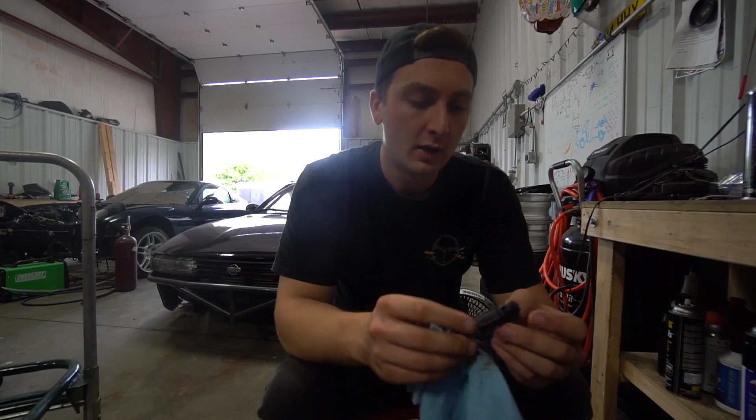And to do that, we need to up the injector size. That's the most important one. So right now, what is the stock injector, like 250s or something? I think it's even smaller than that. Sick. So we got stock 350Z injectors, and I guess they plug right in, which is pretty cool. Shout out to Damien from Haggard North, because I stole these from him. These should be fine. These should give us enough fuel for the amount of air that we want to force into his cylinders.

We want it to peak at like 8 to 10 psi. The stock long block should be perfectly fine for it. I've heard plenty of stories of guys running way more than that for years. But we have the new motor. So if we blow this one up, we have a mint one soon. We're doing head gasket and studs so we can make even more power, refreshing it, and that's about it.

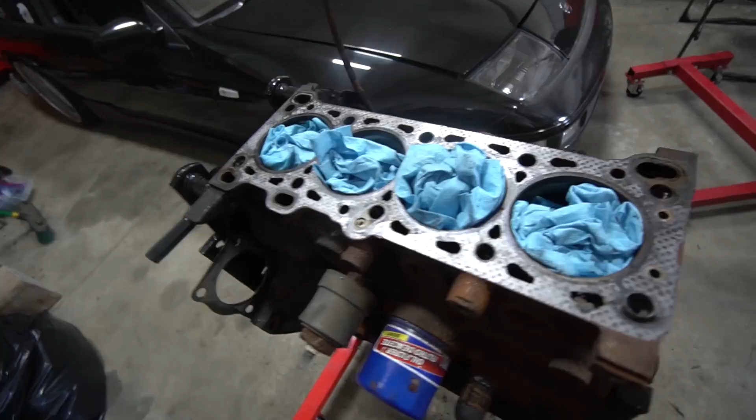Anything else you want to add, RJ? Ordered about 70% of the stuff for this today. Got front cover gaskets and all the other stuff, head gasket. I got the ARP studs coming in next week. And I've got a couple other things over here for it. I've got the bigger fuel pump and the relays and stuff like that, so when we do go to it. I've got a stage 2 clutch so we can handle a little bit more power so mine doesn't slip like crazy. Yeah, we'll see if your clutch holds up to the dyno today. Yeah, we'll see how that goes. That's the only thing I'm really worried about. But I got everything else to pretty much seal together.

A couple other things, we're gonna do that coolant reroute kit, and then maybe make some really good reliable horsepower and not just minimal reliable horsepower. I think our main goal is for RJ to make 250 horsepower, which is super doable, and 250 horsepower in that car is gonna feel like a lot.

So I'm excited, probably makes like 160 right now. My guess is 130. No, it's not that low. That's my guess, 130 wheel. It's alright, so tell us in the comments what you think it makes. Want to throw money on it? Yeah, I got $20 on... we're gonna hit 212 today, wheel? Yeah, alright, I got $20 on 180.

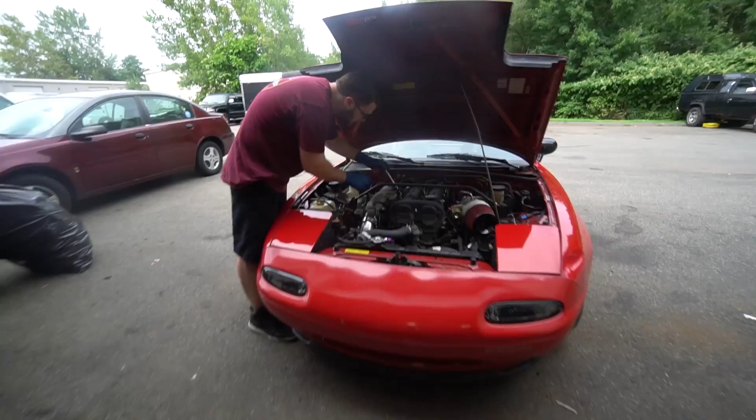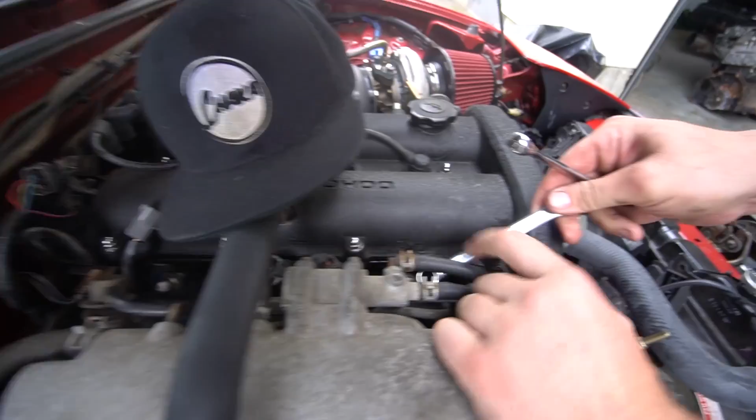These aren't 12s, are they 13s? That's a 12, which one is this one? It's a 12, right? Yeah. These bolts want to break so bad. First problem of the day. It's literally taking me 20 minutes to get the bolt out halfway. If this thing snaps, I'm literally gonna cry. Same, I am also going to cry. You're gonna be giving me a ride home.

Alright, so we didn't do enough research. It's okay, I'm not scared to admit it. So we thought they would be more plug and play, but the problem is the way the overall injector is. Do we have the other one? Yeah, I'll go get it. Stay here, just wait for me.

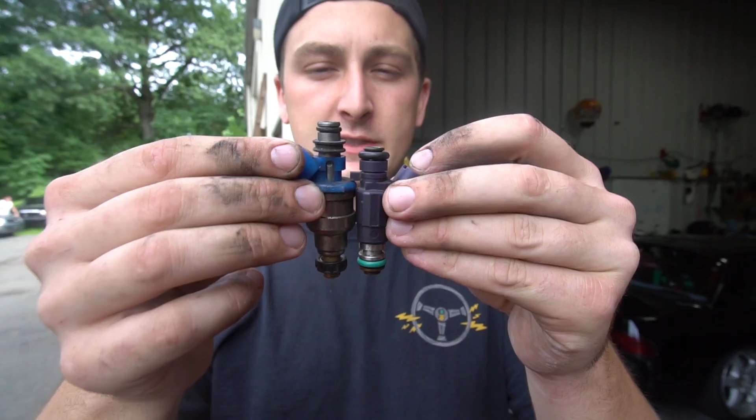Alright guys, so these are top feed injectors, so it's pretty easy to make other top feeds work. As you can see though, it's quite a bit taller than the 350Z injector. It's actually equivalent to like the same length as the BMW injector which I have, but they're not big enough, so that's not gonna work. But they have different style O-ring seats, as you can see. The top is also skinnier. So to make this work, we need a whole entire different O-ring setup, and I can't reuse these. They're not gonna fit, and they're crusty, so it's just not gonna happen today. Unfortunately, we weren't prepared, but we learned our lesson.

So if you want to use Nissan injectors in a Miata, you can, you just gotta rig it up. Unfortunately, we're gonna throw the stock injectors back in, but we're gonna max the crap out of the duty cycle and try and get at least 200 horsepower out of this thing today. That's my goal, so sound good RJ? Sounds fine, learn from our mistakes guys. Well, what do you mean ours? Mine, learn from my mistake.

I was just gonna buy 550cc's. You said fuck it, we'll use 350Z's.

Big waste of an hour and a half, but it's back together. See if we can find a manual boost controller and then up the boost and go from there. So like I said, we're just gonna try and get as much out of the factory injectors as we can right now and see what we could do.

So this video has turned into how much power you can make on everything stock besides the ECU. I think it'll be a good test. Yeah, it's been running fine the way it is with everything else on it. Actually, let's see what happens. It's probably one of the biggest questions of turbo Miatas, like how much power can I get out of not spending any money? Boost, yeah exactly, biggest budget. Let's go figure it out.

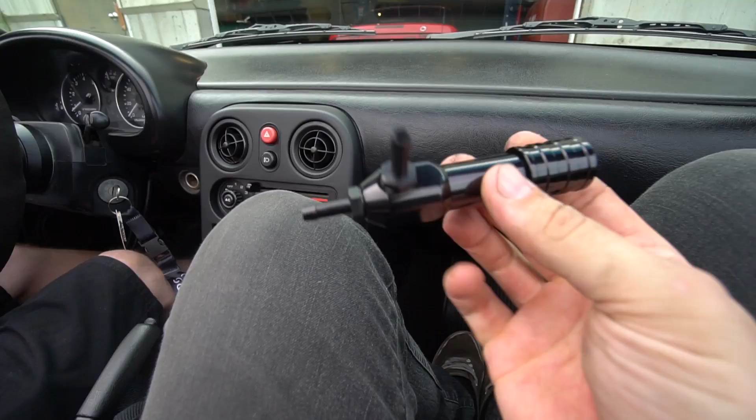Justin could fix anything, ask me. Can you fix a broken heart? He definitely can. All right, let's up the boost on this thing.

We're gonna do a run on low boost, which is about peaking 5 to 6, and then we're gonna up it to about 8, peaking 10.

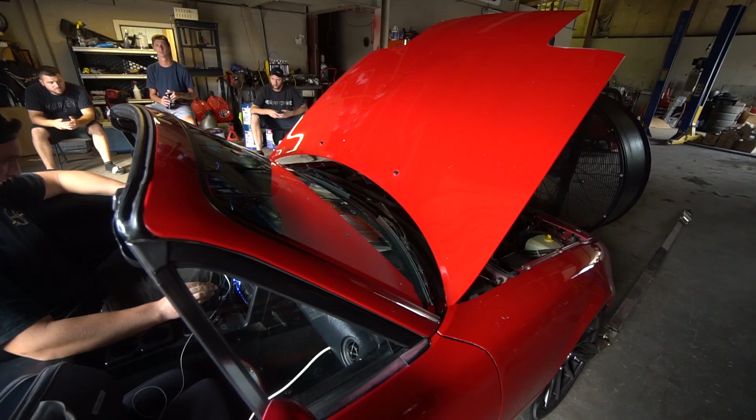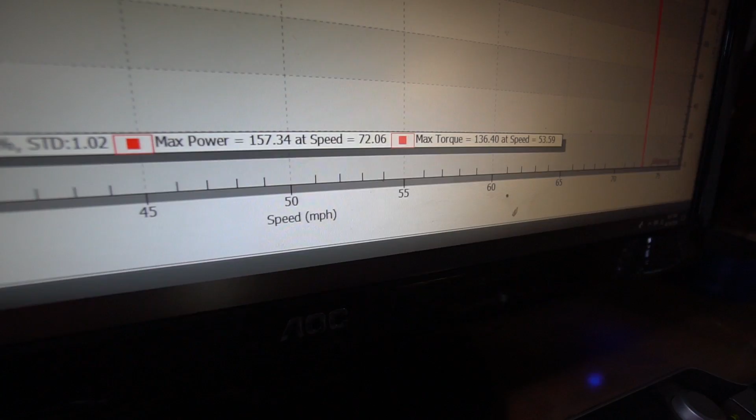How'd we do? Bad. Well, that was a lot more than I thought. 157. How much was that? 3 psi? I didn't even check the peak.

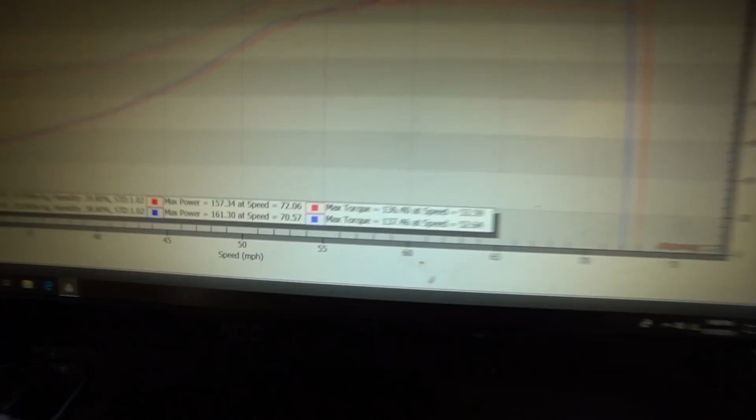All right, so we got the boost control on, and we don't know what it's gonna boost at yet, so we're gonna ease into it, right? Totally. You set a boost cut just in case.

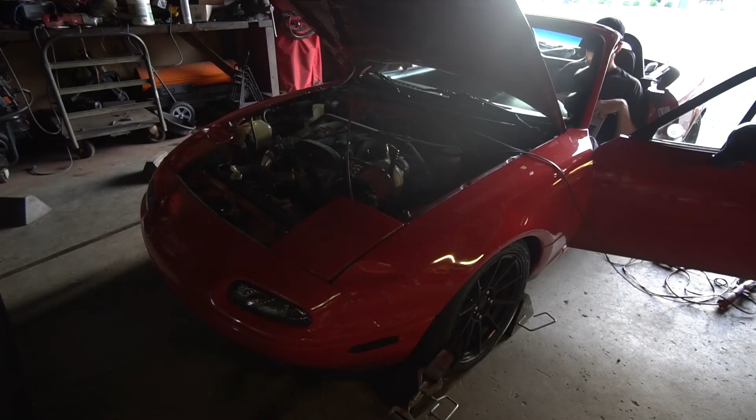The AFR is beautiful. You are out of injector. Really? What boost was that? All of it. 183, and we're out of injector. And our AFRs are beautiful.

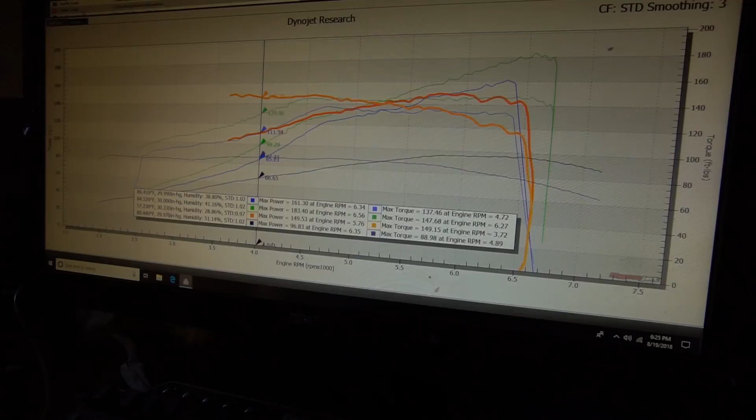Wow, I had high hopes for a 200, but 180 is really good, given this car probably makes 80 horsepower without it. 183, 96 horsepower, stock Miata right there. Probably had low miles on RJ's too, so yeah, basically double the horsepower.

I call that pretty good, so that's stock, stock injectors, stock pump, stock everything. Everything sucks for that turbo. Yeah, the turbo and the Mega Squirt. Not bad, it's pretty good.

We need more injector. You clean the fuel map up a lot, try to blend it together, just all rigid numbers, but very cool. Let's try it.

So the boost didn't change at all, we just cleaned the map up, and we got 30 horsepower out of it. So that's why I didn't do it. But there it is, guys, you can officially make 183 horsepower on stock everything but a turbo.

Wheel horsepower too, pretty good given this. It's doubling almost factory horsepower. So that's pretty sick.

Holy fuck! Oh, you feel it at like 4 grand, that's when you really feel it. Yeah, not bad, definitely dude, a little bit more. You can feel that 30, that little extra, take it dude.

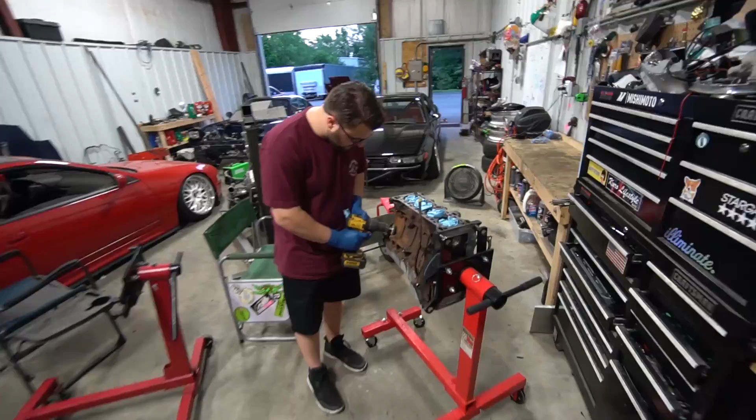And RJ, tell them. Oh, I remember now, you owe me 20 dollars.